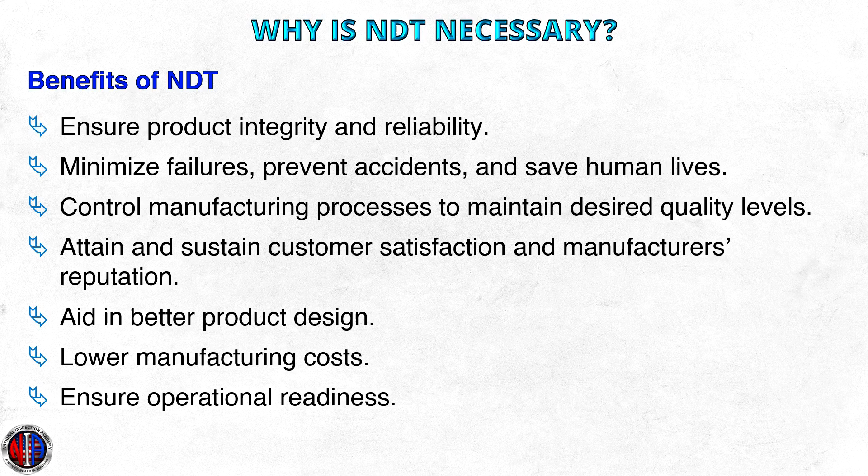Over the last 100 years, NDT has matured considerably as an invaluable service that can directly or indirectly benefit industry and the public in a number of ways, such as ensuring product integrity and reliability, minimizing failures, preventing accidents, and saving human lives, controlling manufacturing processes to maintain desired quality levels, attaining and sustaining customer satisfaction and manufacturer's reputation, aiding in better product design, lowering manufacturing costs, and ensuring operational readiness.

Engineering demands for sounder materials. Another justification for non-destructive tests is design demands for materials that have fewer inherent discontinuities.

As size and weight decrease and the safety factor is lowered, more emphasis is placed on better raw material control and higher quality of materials, manufacturing processes, and workmanship. NDT is frequently called on to confirm delivery of this new quality level.

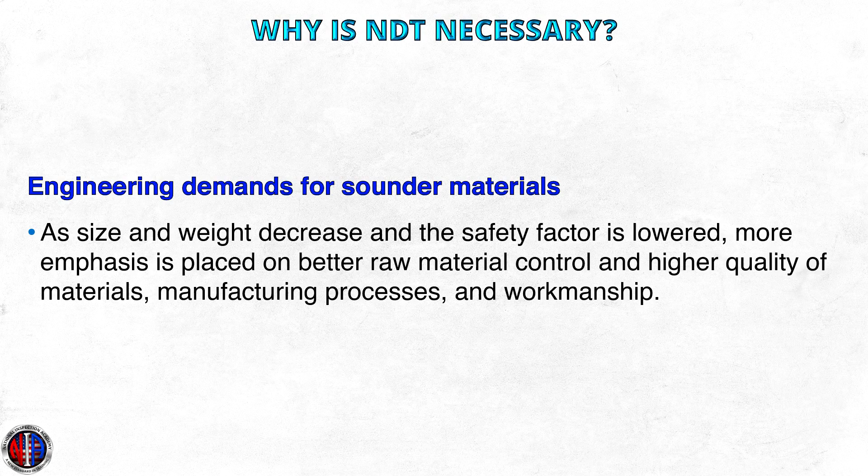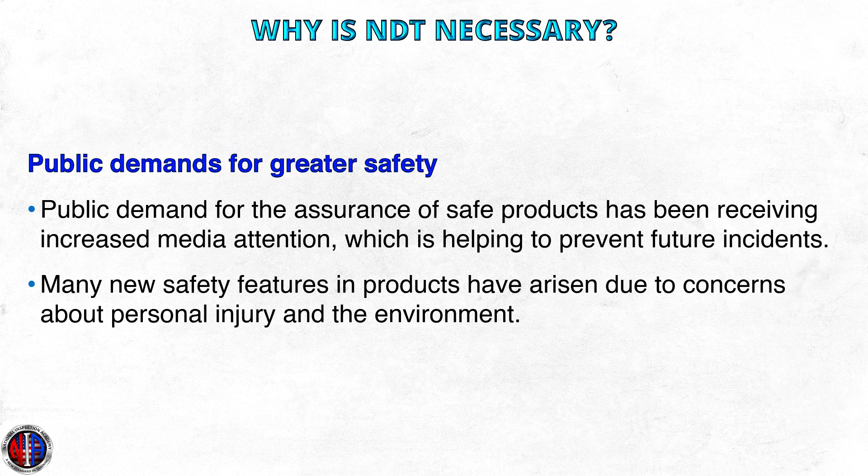Public demands for greater safety. Public demand for the assurance of safe products has been receiving increased media attention, which is helping to prevent future incidents. Many new safety features in products have arisen due to concerns about personal injury and the environment.

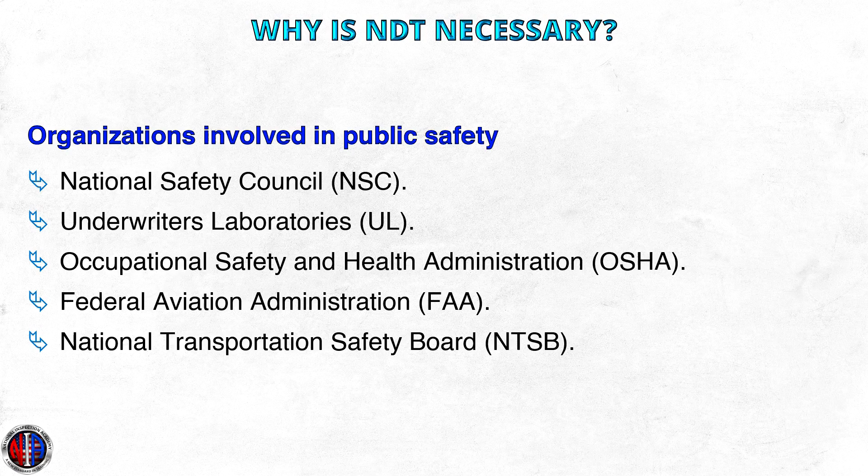This public demand for safety is backed by organizations such as the National Safety Council, Underwriters Laboratories, Occupational Safety and Health Administration, Federal Aviation Administration, and others.

Rising costs of failure. Aside from awards to the injured or to estates of the deceased, or costs to the public such as evacuations caused by a chemical leak, there are other factors in the rising costs of mechanical failure.

These costs are increasing for many reasons, including greater costs of material and labor, greater costs of complex parts, greater costs because of the complexity of assemblies, a greater probability that failure of one part will cause failure of others because of overloads, and the probability that the failure of one part will damage other high-value parts.

Also of note is possible part failure in integrated automatic production machines, shutting down an entire high-speed production line. In the past, when production was carried out on many separate machines, the broken unit could be bypassed until repaired.

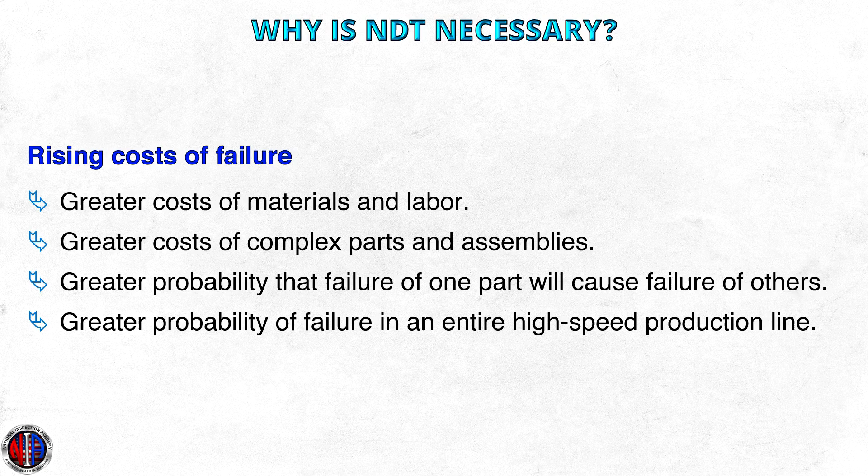Today, one machine is often tied into the production cycle of several others. Loss of such production is one of the greatest losses resulting from part failure.

When and where is NDT used? NDT is most commonly used where component failure may have catastrophic consequences, such as in airplanes, electric power plants, petrochemical plants, gas transmission lines, offshore drilling platforms, and ground transportation systems and structures.

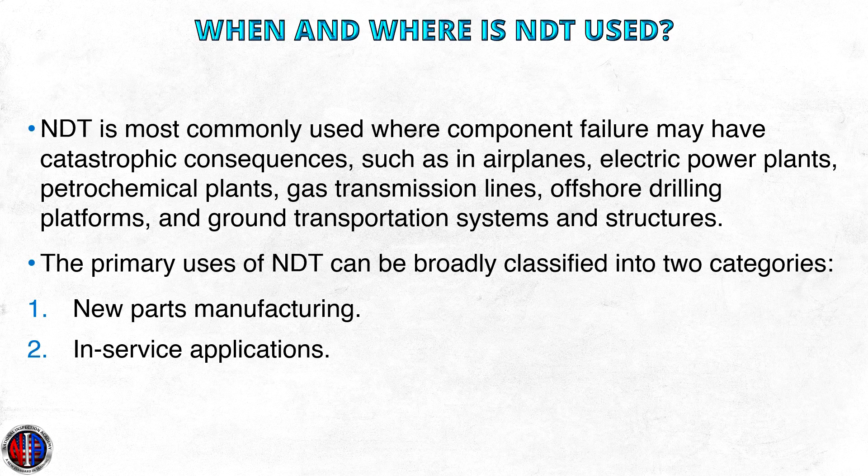The primary use of NDT can be broadly classified into two categories: one, new parts manufacturing, and two, in-service applications.

New parts manufacturing is the testing of products through the manufacturing process to ensure the parts comply with design specifications, from testing incoming raw materials to the final acceptance of the product. NDT is applied systematically at various stages in the manufacturing process.

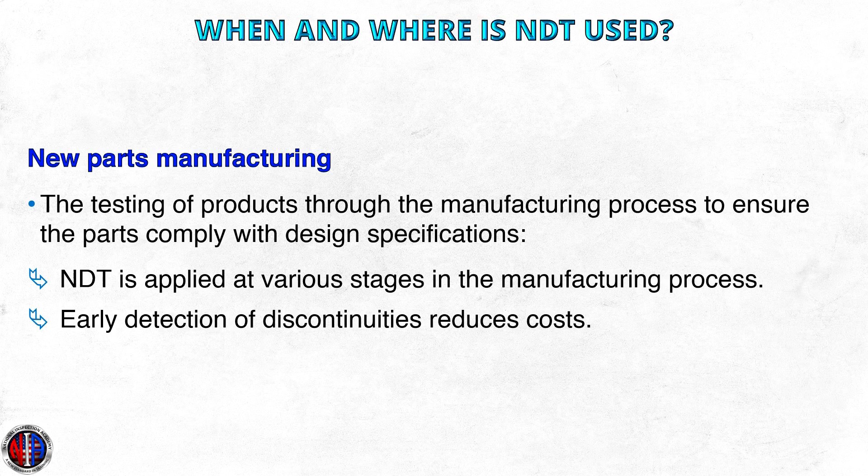It is used for process control, to ensure that the item meets the acceptance criteria established for each stage of an item's development. This process starts with the selection of raw materials and continues through to final assembly. Early detection of discontinuities reduces costs associated with scrap and rework and avoids the costs of returns and customer dissatisfaction.

In-service applications. In-service applications comprise the periodic inspection of items that are involved in some type of ongoing service, to determine whether the items are suitable for continued service.

The advantages of NDT for in-service applications include early detection of potentially dangerous and costly unscheduled service interruptions, and the ability to monitor degradation processes from which realistic and cost-effective reinspection schedules can be developed.

The extent to which a part's strength or service life is affected in a specific service environment by the presence of a given discontinuity cannot be readily estimated.

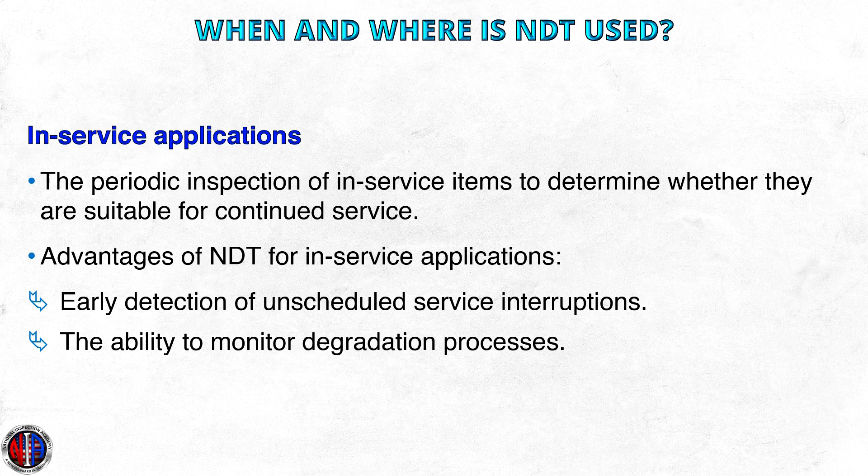Where is NDT used in industry? NDT can be found in almost all professions and industries where material quality control or the testing of in-use products is required. The most prominent of these industry sectors are manufacturing,

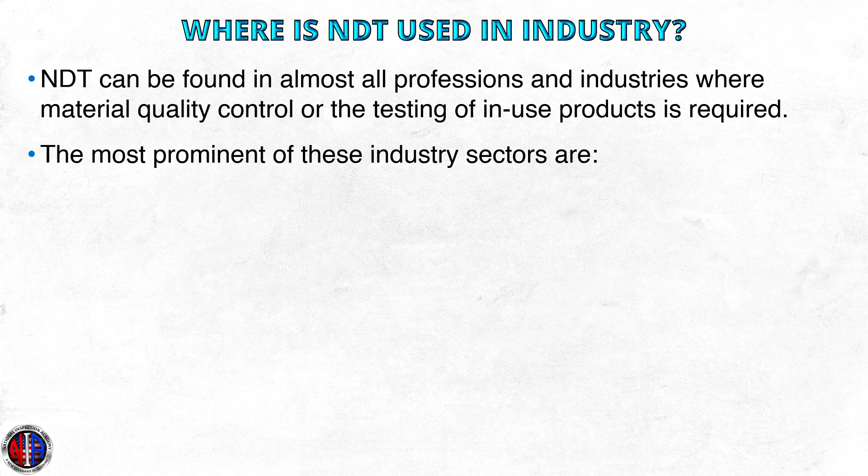petroleum chemical or petrochem, aerospace, maritime or marine, construction, military, and power generation.

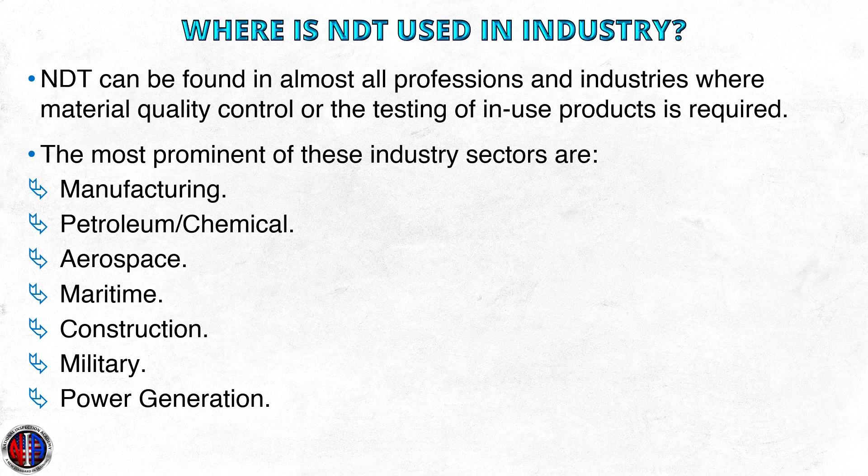Manufacturing. Material quality control and testing of in-use hardware is crucial to ensure that products meet design specifications. NDT inspection points are typically found in raw material testing, forging, casting, machining, welding, and fabrication. Manufacturing of nearly all products requires non-destructive testing. The extent of non-destructive testing depends on the complexity of the end product and the acceptable risk.

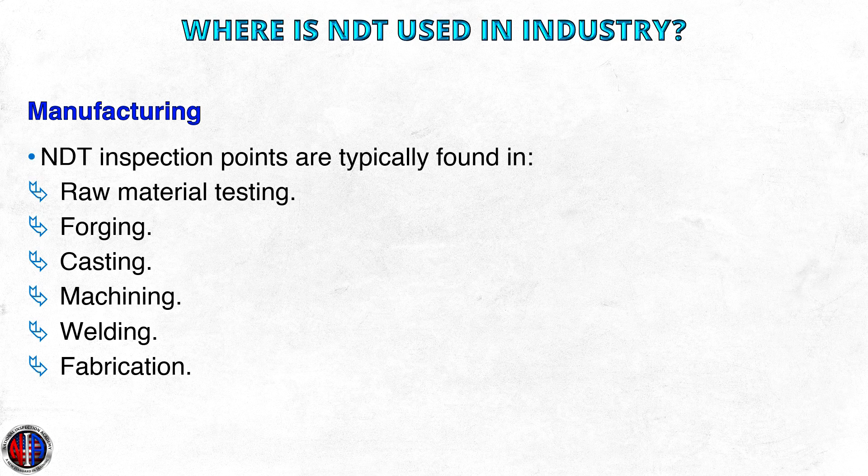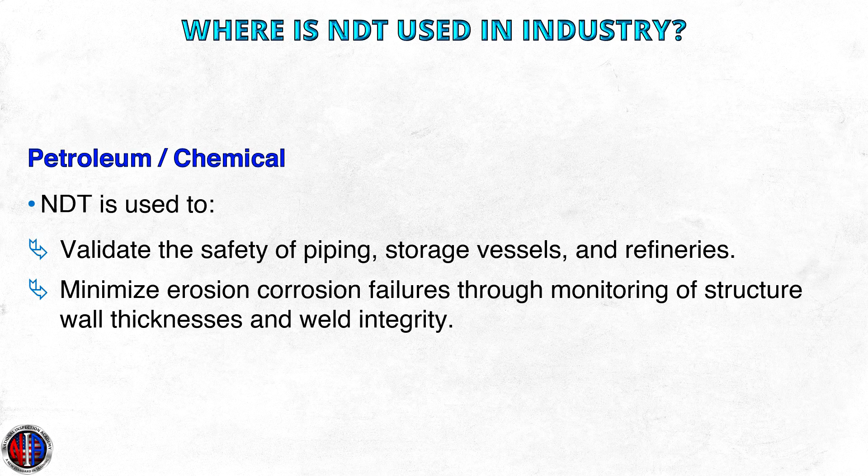The petroleum and chemical sector uses non-destructive testing to validate the safety of piping, storage vessels, and refineries. The NDT applications in this sector minimize erosion and corrosion failures through monitoring of structural wall thicknesses and weld integrity, keeping dangerous chemicals and petroleum products within their containment systems.

Aerospace. Discovering discontinuities and monitoring their growth is paramount in in-service inspection of aircraft and spacecraft. Scheduled periodic NDT of airframes and engines is vital to ensuring the safety of passengers and cargo while simultaneously lengthening the intervals between repair and replacement. The aerospace industry requires precision non-destructive testing with a high level probability of discontinuity detection to increase safety.

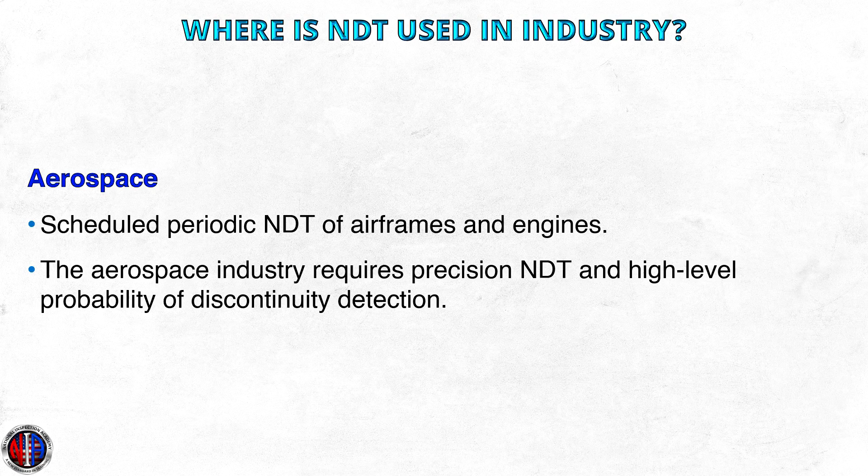Maritime. NDT in the maritime industry includes commercial diving, oil rigs, ships, and underwater pipelines.

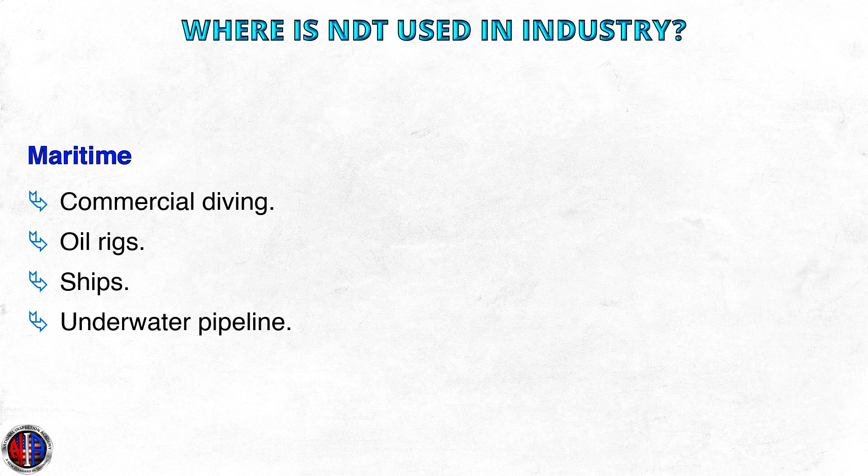Construction. Non-destructive testing is routinely called upon in the construction industry to validate the quality of buildings and highway infrastructure, including bridges. Testing of weld quality and concrete quality and cure state are the primary construction NDT applications.

The cure state of concrete refers to the amount of compressive strength the concrete has achieved throughout its curing cycle. Often when you place concrete, when it's in its mobile state, we consider that its plastic state, where it's flowable. Then once it starts to set up and cure, we call that the cure state.

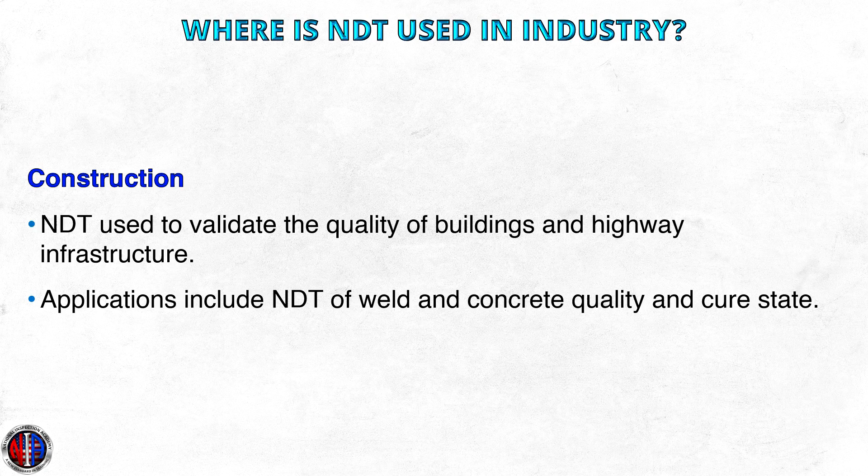Typically concrete meets 75% of its compression strength within 7 days of being placed, and it doesn't typically reach its full cure state, meaning its compressive strength, for approximately 28 days. So various types of non-destructive testing methods can check that concrete's cure state and determine where it's at in its curing cycle.

The military sector. The United States Armed Forces utilizes non-destructive testing to maintain weapons, for procurement first article testing of newly manufactured items, and to validate ammunition quality.

In addition, what a lot of people don't recognize is that the military also controls many parts of the infrastructure within the United States. For example, the United States Army Corps of Engineers, part of the U.S. Army, controls a lot of hydroelectric dams within the United States. So there's a tremendous amount of non-destructive testing used with the verification of the fabrication and the in-service status of various dam components and structures, steel gates, navigational locks, and things like that.

So we're talking about where NDT is used in the military. It's not just for weapon systems and ammunition quality. It's also for a lot of other elements that are part of other industries such as infrastructure, construction, or maritime.

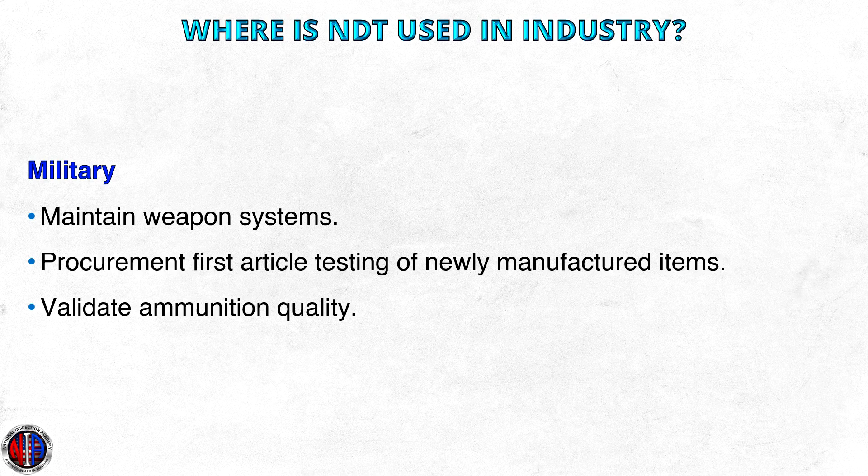Power generation requires non-destructive testing to keep power turbines running efficiently. Power turbines, typically powered by gas, nuclear, wind, water, or steam, require frequent and planned NDT to keep electrical power flowing to customers.

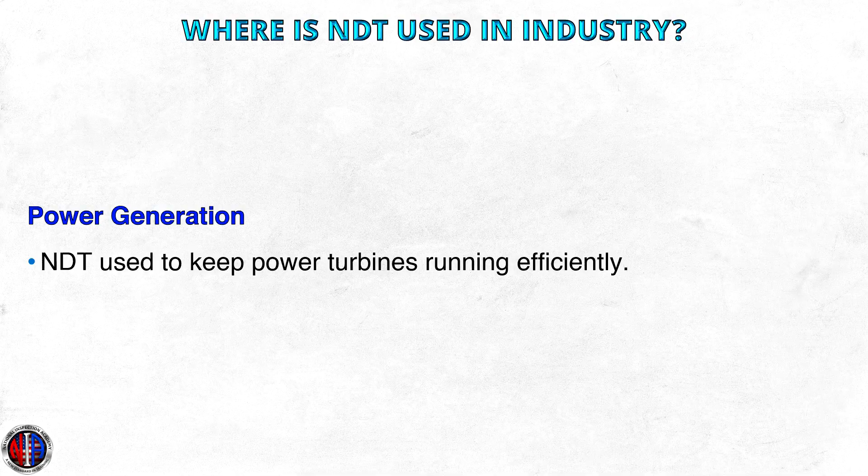Some less obvious uses of non-destructive testing include verifying the original fabrication and the in-service quality of amusement park rides. When we look at amusement parks, they're fairly complex structures. When we look at roller coasters and many amusement park rides, safety is a huge concern.

So let's just say Disney, for example - they have full-time non-destructive testing technicians constantly going over all their amusement park rides to make sure there is no fatigue or potential failure with any of their rides. Research and development projects.

There are a lot of laboratories out there constantly doing non-destructive testing in a research or development capacity, developing new products or new ways to perform NDT or to verify new ways of performing quality control on various objects. And also the railway system.

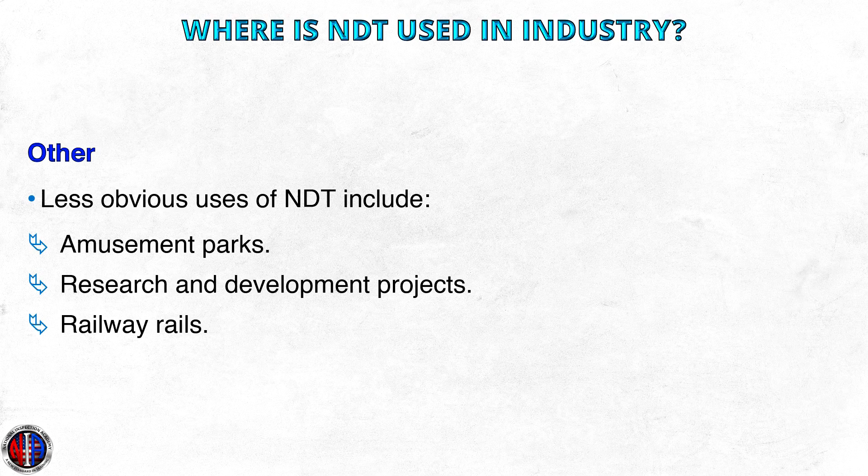There's a tremendous number of railways in the United States, and all of these railway lines are required to be inspected on a very routine basis to make sure the track systems are operating as they should and there hasn't been any structural damage. So there's a whole industry of NDT techs that ride on very small rail cars, essentially independently down the tracks, automatically ultrasonically testing the rails they are riding on, checking for any in-service defects.

Non-destructive testing methods. Today, the visual testing method is still the most widely used, but is supplemented by a vast array of additional non-destructive tests.

The most widely known physical and chemical means used to investigate the composition of test parts rely on sound waves, electrical currents, magnetic fields, radiation, thermal waves, and tracer liquids or gases directed into, and in most cases, to penetrate the materials being tested. NDT has been adopted by many technical and regulatory agencies to evaluate an item's ability to meet in-service performance expectations. The assumption is that if an item is free from unacceptable conditions, it should meet performance expectations, that is, carrying loads, withstanding vibrations, or maintaining dimensional integrity.

The technology has matured to the extent that some methods have become standard practice. The selection of an appropriate NDT method for specific applications is based upon the physical characteristics of the material, for example, whether it's magnetic, metallic, massive in size, or irregularly shaped, and the discontinuities of interest, including probable location, orientation, size, and morphology.

Test parts with simple structures and geometries are easier to analyze than those containing complex configurations. Large, singular discontinuities are easier to detect and assess than distributed collections of small discontinuities that may extend over a large area. The NDT technique selected for inspecting a part or component is unique to each material and service application.

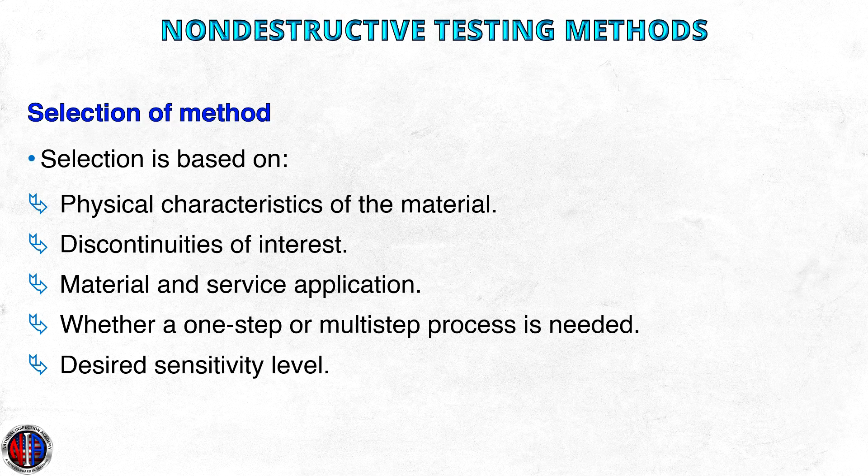The American Society for Non-Destructive Testing currently recognizes 16 different non-destructive testing methods. They are, in alphabetical order, acoustic emission testing, abbreviated AE,

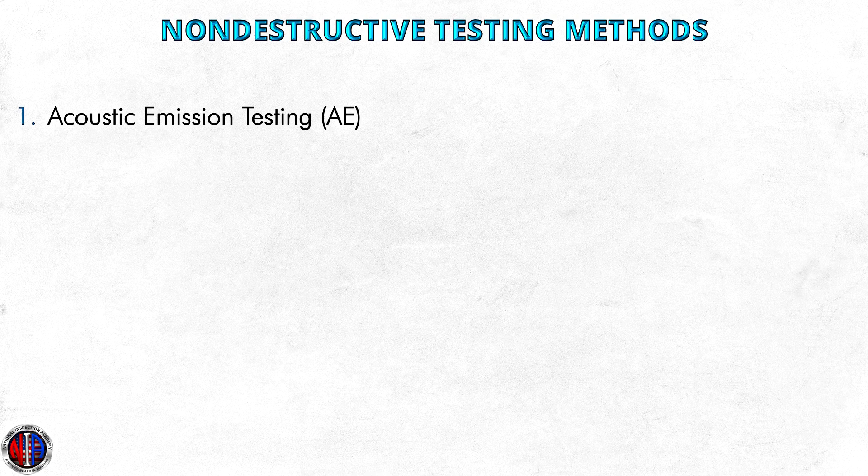electromagnetic testing, abbreviated ET, ground penetrating radar, or GPR, which there has been talk about removing as a non-destructive testing method under the guise of the American Society for Non-Destructive Testing, only because most ground penetrating radar isn't performed by non-destructive testing technicians. They're typically performed by construction material technicians in more of a geotechnical capacity. So it's not really in the realm of what we typically consider non-destructive testing. So there's been talk about removing ground penetrating radar from the list.

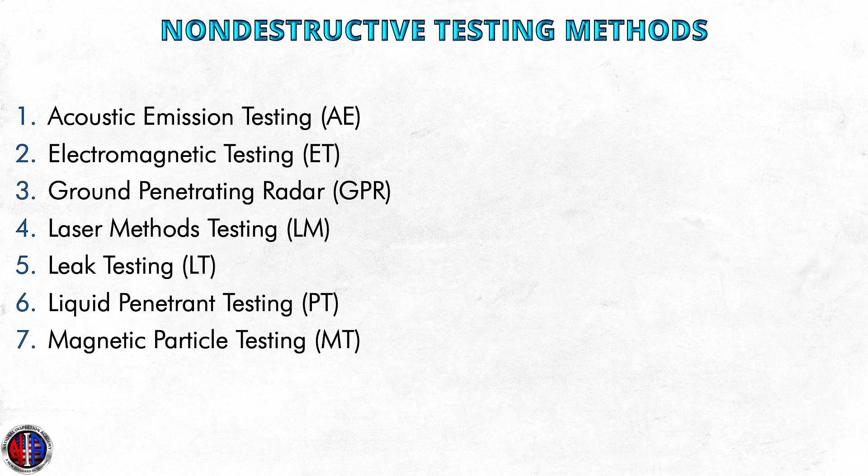Number 4 is laser methods testing, which is a fairly new NDT method that's really in its infancy as becoming a well-used common test method. It's abbreviated LM. Then we have leak testing, LT, liquid penetrant testing, or PT, magnetic particle testing, MT, magnetic flux leakage testing, or MFL, microwave testing, MW, which, like the laser method testing, is a fairly new non-destructive testing method that is becoming more popular in various industries. It has some pretty significant limitations, however.

Number 10 is radiographic testing. 11 is neutron radiographic testing, or NR. 12 is thermal or infrared testing, IR. 13 is ultrasonic testing, UT. 14 is guided wave testing, or GW. 15 is vibration analysis, or VA. And 16 is visual testing, or VT.

Now, of these 16 methods, the most commonly used are electromagnetic testing, liquid penetrant testing, magnetic particle testing, magnetic flux leakage testing, radiographic testing, ultrasonic testing, and visual testing.

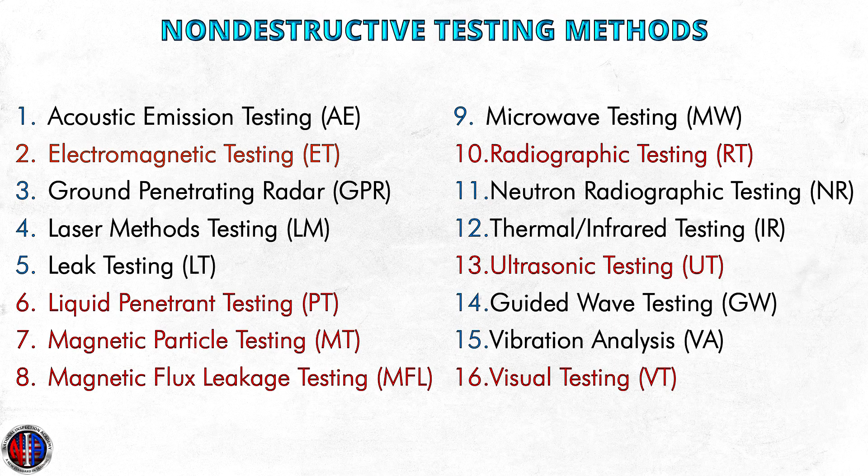Now, throughout any non-destructive testing training program, you'll hear the term method and the term technique. So what's the difference between method versus technique? The term method is used to describe a collection of inspection techniques. This classification system is useful because a method is defined by the probing energy that is used, whereas techniques are ways that the probing energy is applied or detected.

Probing energy and materials used in non-destructive testing include electromagnetic waves, mechanical vibration or waves, particles, and liquids. So for example, you may hear the term probing medium. That's commonly thrown around in the non-destructive testing arena. What that means is, what is the type of energy that is being imparted on the test object that we are looking to have any potential discontinuities interrupt that medium, giving us some type of signal or indication that there is something within the part.

So the ultrasonic testing method uses sound waves, or really mechanical vibrations, in the part. So when the ultrasonic test is performed, we introduce a sound wave or mechanical vibration that travels through the part, and if it impacts a discontinuity or something within the part, that mechanical vibration returns back to our test system, our transducer, giving us an indication that there is something within the part. Other types of non-destructive testing methods use different types of probing medium.

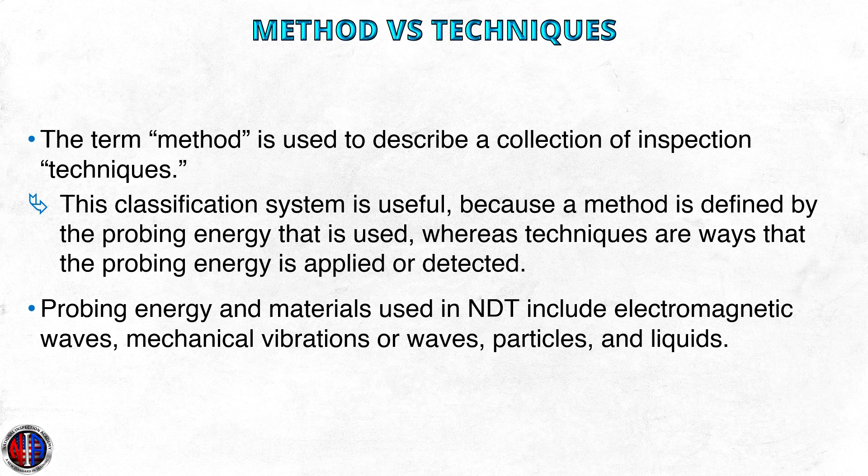Magnetic particle testing, for example, uses magnetic fields that travel through the part. Liquid penetrant testing doesn't really use a probing medium. Instead, we have a colored dye that will seep into any surface breaking indications, and then we draw that dye out using a developer that gives us a visual indication on the test object. So there are lots of different NDT methods, and they use different types of probing medium. That's how we break down the methods, by the type of probing medium used.

As an example, in the ultrasonic testing method, where the probing energy is high-frequency sound waves, meaning mechanical vibrations, the UT method includes single probe techniques, dual probe techniques, tests where the probe directly touches the test object or where the test object is immersed in water, and many other variations of the technique. But they're all using the same type of probing medium.

Now, there are some times when the same probing medium is split between two different methods. What typically happens is when we have a test method, ultrasonics is a great example, where we're using sound waves, if we have a technique that diverges far enough away from the primary method to where it almost needs its own type of training and classification, then it will separate out.

A good example is acoustic emission testing, which uses sound waves as well. It's very similar to ultrasonic testing. The difference is that instead of transmitting a sound wave and waiting for a return signal, we have a probe that's permanently mounted to, say, a bridge. And if a crack were initiated, that cracking sends a sound wave out throughout the structure, and it's picked up by that probe that's permanently mounted.

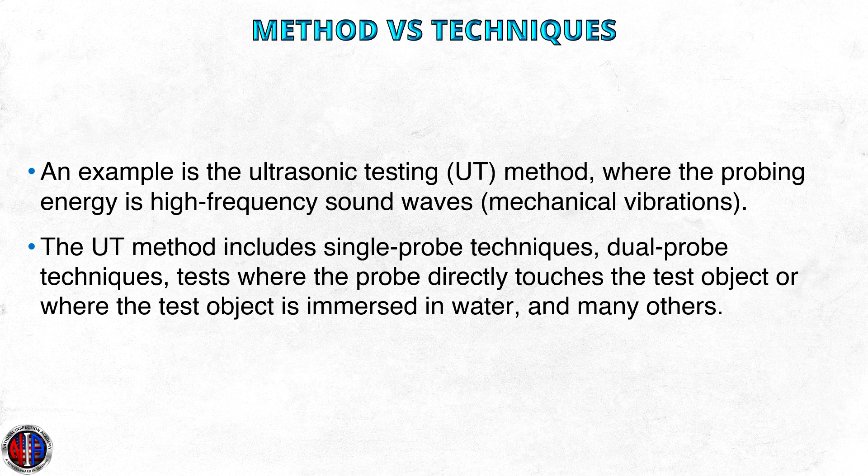You'll learn more about these techniques as we start talking specifically about these NDT methods. But that's the difference between a method and a technique. And that concludes this lesson.